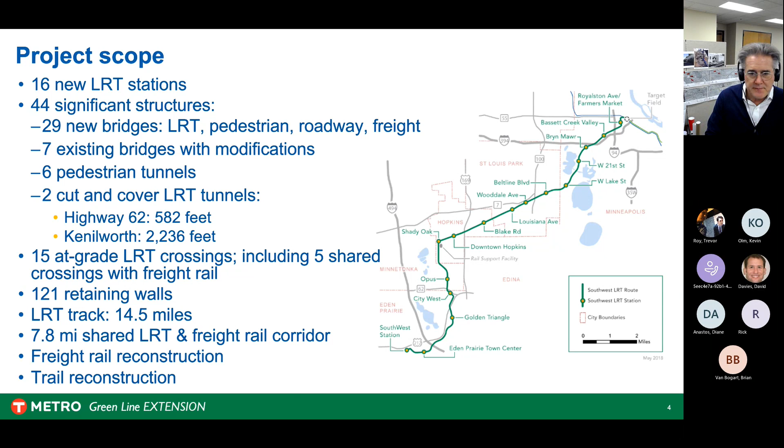That's really the system work, that's much of what you see. For people from Eden Prairie or Minnetonka, quite a bit of that civil work has already been completed - all the bridges, the tunnel, and the track have been laid all the way through a portion of Minnetonka, so we've got quite a bit of work done there. You may also notice, if you're in that area, the catenary poles and some components of our electrical system.

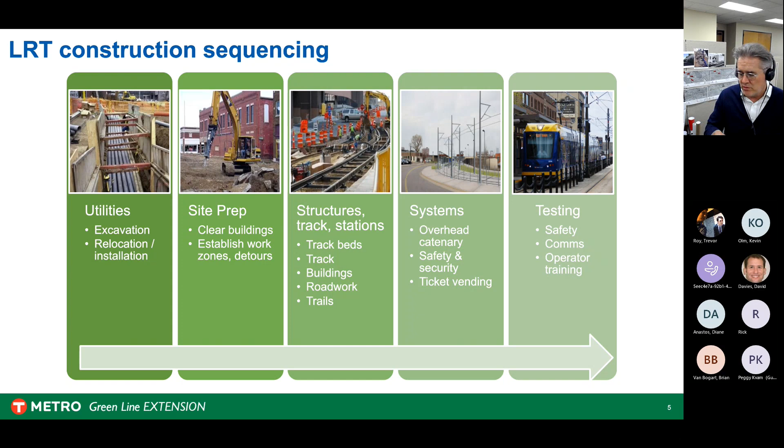And then, of course, after that is done, when we are complete with civil and systems work throughout the corridor, we'll continue on with the testing component, which will take 6 to 9 months.

For those people who have followed our project, we've had a little bit of a delay, some project cost increases, in order to resolve some of the reasons or new components that we've added to that existing contract that had some things to do with those increases.

We had to revise the civil construction contract with a civil contractor, and that's related to the schedule and the procurement for the systems. So we had to revise the systems schedule as well based on earlier revisions with civil. And then we've still got to extend the supporting contract and complete all the total cost negotiations. Then we will have a more revised and accurate project schedule and cost.

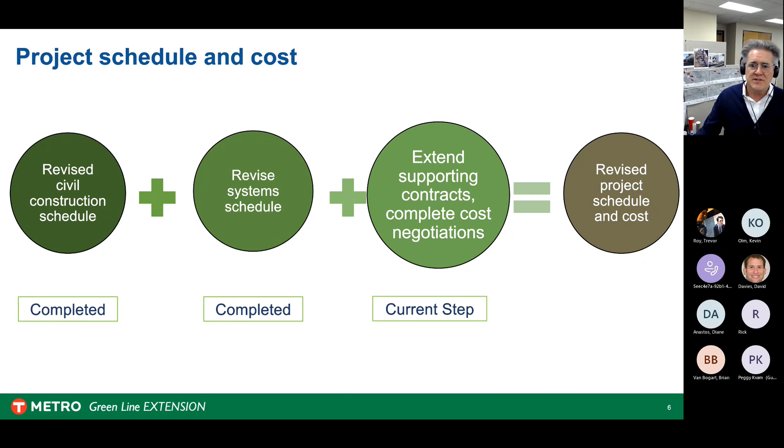I think part of the upside of this slide is that from January 2023, we're exceeding our overall goal of 15% DBE contracts.

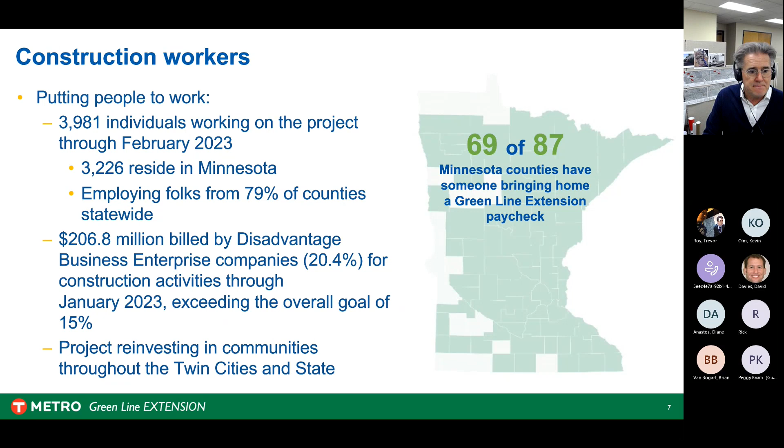So we are very cognizant of the trail community. We have a lot of bike riders even on our project, and it's something we're paying close attention to. We work as much as possible with the contractor to try to improve those timetables and reopen those trails and that entire segment as soon as we're able to do that safely.

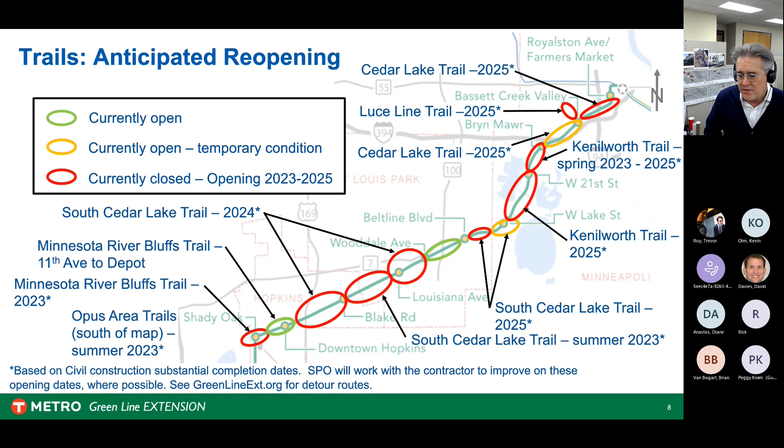All right, on to the 2023 construction highlights. I don't see anything in the chat box. Any questions? So I'll just continue on at the moment.

All right, Eden Prairie. Those of you who live in Eden Prairie, it's very obvious that most of the civil work is done. Most of the big traffic impacts are completed. As you know, we've got a few still remaining for those of you who drive in the area.

We have the final phase 2 construction at Southwest Station starting May 1st to complete the new entry and turnaround areas. Phase 1 construction was the new temporary waiting area, the new bus loop turnaround, and also the addition to the parking ramp. The relocation of Southwest Transit is supposed to happen very soon.

We expect it to happen as early as May 1st, when we will help Southwest Transit relocate to the new loop and also to the new waiting area. They will take ownership of that and begin operating out of there. And then we'll use that as the opportunity to take down the temporary station we put up a couple of years ago for them and resume construction.

There will be some piling for those of you who are down there, some 437 piles we still need to put in to complete that entry and turnaround area. The systems contractor is completing foundations, traction-powered substations, signal houses, poles, arms, and wiring throughout the Eden Prairie segments. The expectation is that most of the systems and civil work is expected to be completed in the Eden Prairie segment by the end of this year.

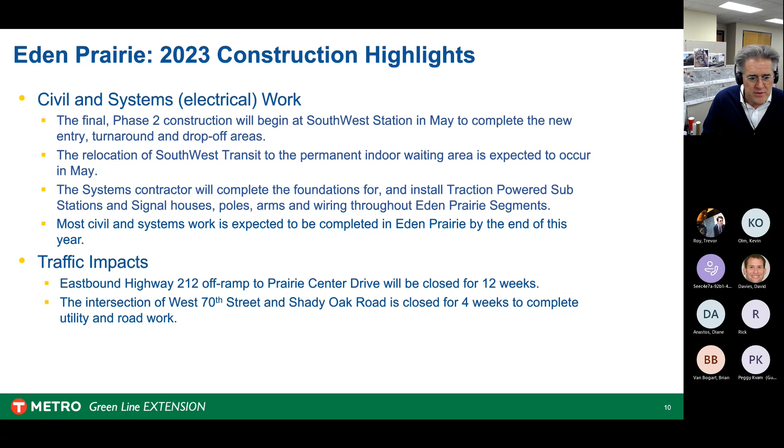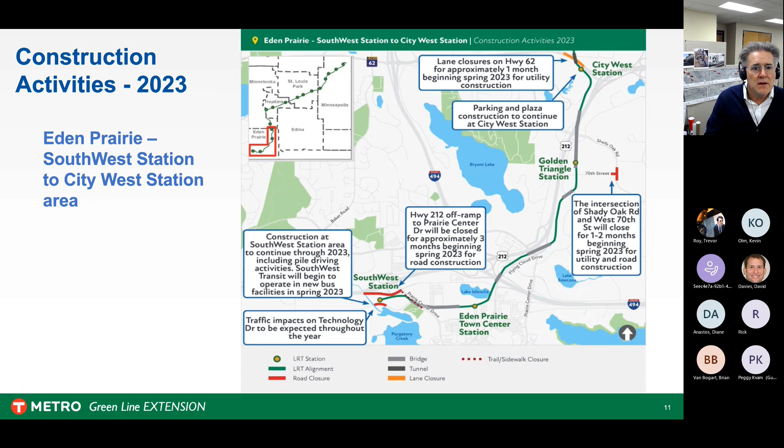We're adding, I think, some 430 additional parking spaces. There'll be around 1,300 total now. And you'll be able to drive through from one end of the parking ramp, the older ramp, to the new section, and then exit and enter and exit right through the parking lot.

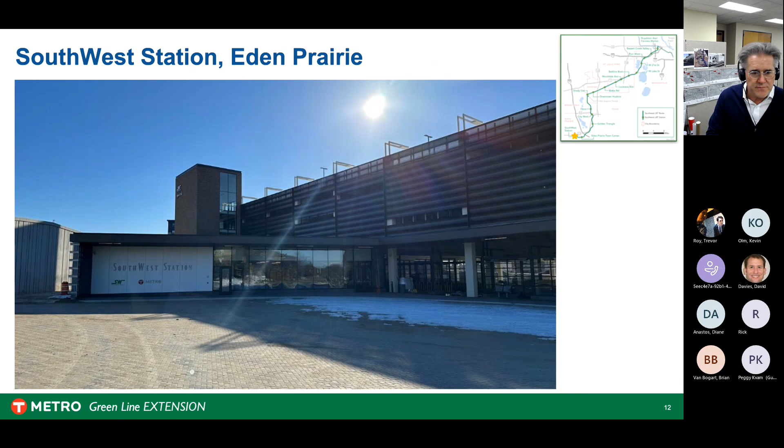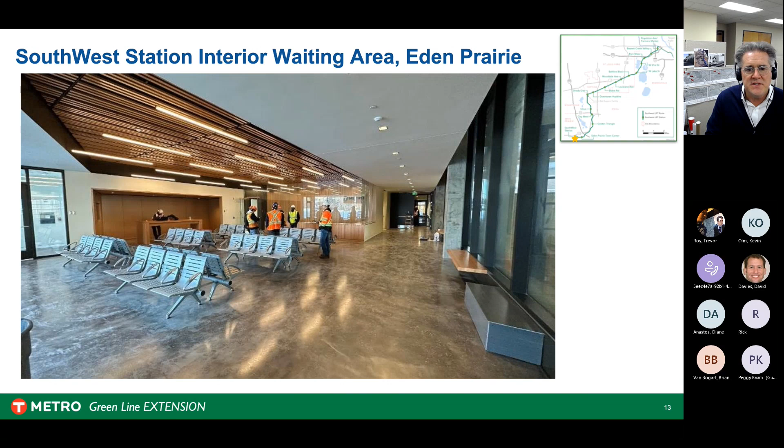The inside of the waiting area, it's a very, I think, somewhat sophisticated interior here. Get the chairs in, and again, this was a couple weeks ago, and they're starting to move in operations now from the temporary waiting area.

Then, of course, taken from the parking garage, you can see the changing landscape in the last 5 years, right? We've had dramatic change down at Southwest Station.

You've got the development of and opening of Elevate, which is running around 97% occupancy, so doing very well. They're on the left-hand side of the picture. You can see there's a new set of shops there that was put up about 4 years ago.

And then in the distance, you can see the iconic water tower. And you can also see the Prairie Center Drive Bridge, the first bridge leaving Southwest Station.

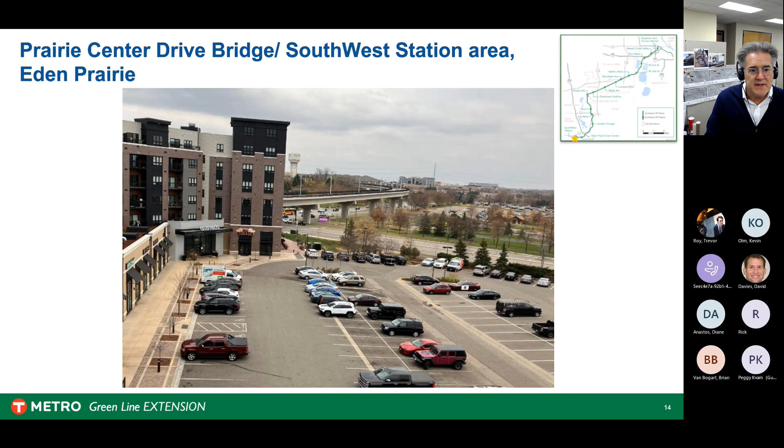And then coming around the turn of that bridge, we see Town Center Station, which is nearly complete as well. We have the new road on the right. You call it the Town Center Extension.

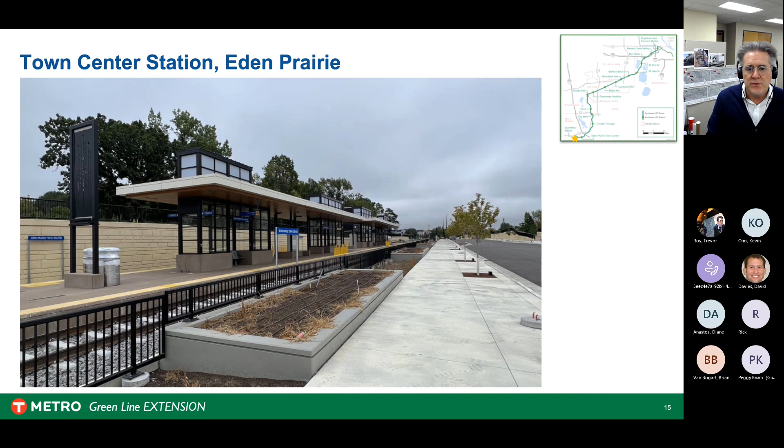We cross West 70th, and then we have our Golden Triangle Station in the distance there. You can see the Optum building just south of Highway 62.

And on the right, for those of you who know the area, you can see Shop HQ. It's that yellow bar and yellow and black building there on the far right. So that station, like all the stations, the progress is going along quite well.

And then you can see, again, the entry from the station to the Shady Oak Highway 212 bridge. Again, a bridge that starts on the east side of Highway 212. We cross Valley View Road, Shady Oak Road, Flying Cloud, Shady Oak. And we cross then to the west side of Highway 212.

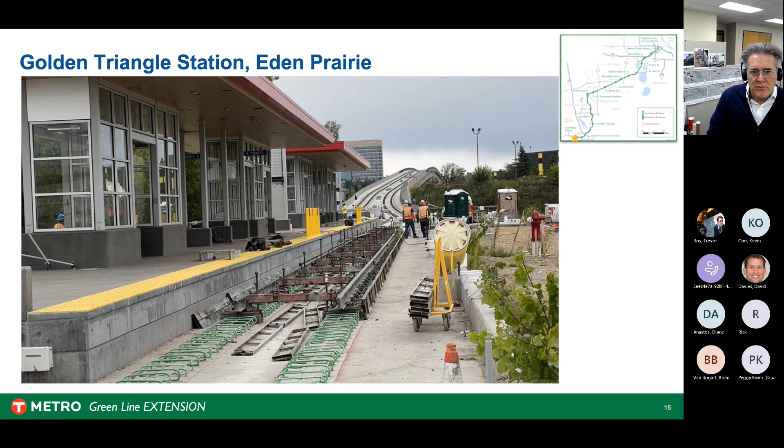We run north, and then when we get to 62, we take a hard turn. You can see right on that corner, just below, just south of 62, a shameless plug for one of our public tours there. You can see a couple of our tour participants there. We had a nice tour.

We were able to walk up alongside of the bridge and onto the bridge, something we will be offering again this year and we'll talk about later on. But that's just a nice view looking south toward Eden Prairie along our Shady Oak Bridge.

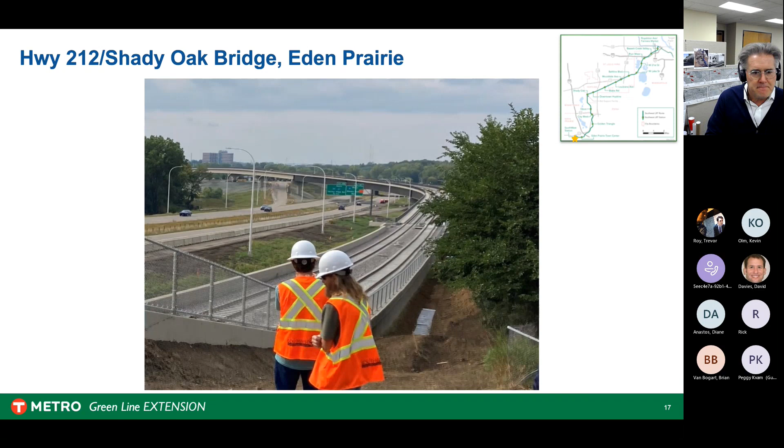And then, of course, if those folks in the picture were to turn around, you'd be looking at 62, and just before 62, we take a hard westerly turn and we enter City West Station area, again, adjacent to the Optum campus. And then from City West Station, you continue on and we go under the tunnel created that goes under Highway 62 into Minnetonka.

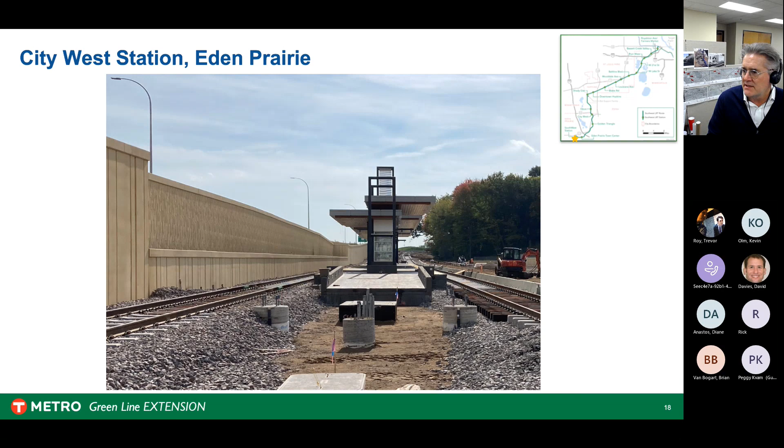So that's sort of the broad overview of 2023 construction in Eden Prairie. We'll continue on to Minnetonka unless anybody has any questions. All right, if not, we'll continue on to Minnetonka.

2023 highlights, again, civil and systems work. We've got road work and landscaping completed in Opus Park this year. And we've got some trails impacted, as people who are in that area know, by our construction, as we do in most cities. And the crews continue to work on the longest bridge in our corridor, the Minnetonka-Hopkins Bridge.

And then again, similar to what's going on in Eden Prairie, we have 16 construction segments in our 14.5-mile alignment, just to break up and organize the construction.

Several of those segments have been turned over by the civil contractor in Eden Prairie, and the same thing is true here in Minnetonka. As they do, the systems contractor picks up the obligations of that corridor and begins systems work—completing foundations, installing traction power substations, the 62 tunnel and signal houses, which if you drive by that area is under construction, and again catenary poles, arms, and wiring up to Smetana Road this year.

Similarly to Eden Prairie, I'd say most civil and systems work is expected to be completed through Smetana Road by the end of this year. That's the hope. And then some traffic impacts.

For those of you who drive through Opus Park, you know Bren Road East is all torn up, a portion of it by the Bren Station apartments, and that's going to be closed for another 10 weeks or so to complete road and trail construction. We also have a single lane closure on Yellow Circle Drive near the LRT tunnel, where the systems contractor is working on foundations for their tunnel house. And then we'll have a bit of a closure for a couple of weeks on Red Circle Drive.

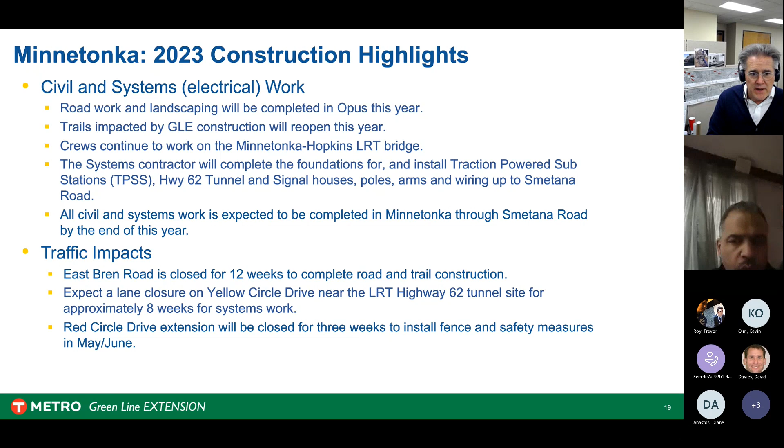We put in a new extension, as people are familiar with Opus Park and the reconfiguration of that park—a brief extension between yellow and red to go around the circle to exit the park, and we're going to be closing that briefly. We needed to complete some fence and safety measures we didn't get to late last year. But again, similarly to Eden Prairie, once all that is wrapped up, we will be out of the way of traffic and out of the way of residents in those areas.

Here's the construction map again. If you choose to look at that, you can have a closer look online later, and you can see the closures in red, with brief descriptions and directional arrows showing you where those closures and that work are taking place.

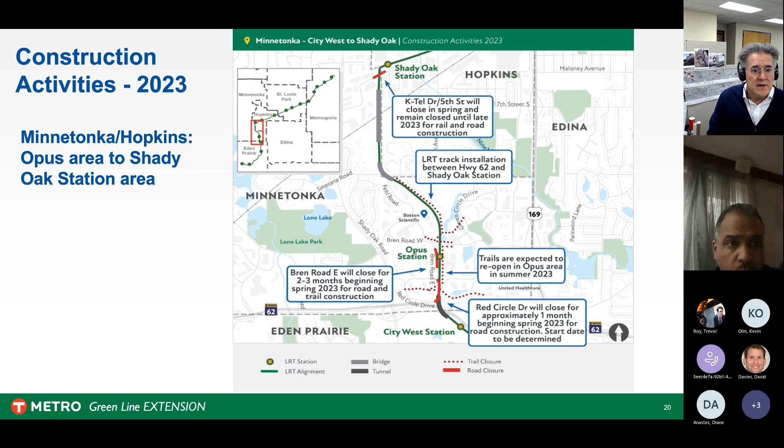Moving on from Minnetonka, we got some photos. Again, another shameless plug for our public tours—they're a great opportunity for people who are interested to get up close and personal with the project construction, in a way you won't be able to once revenue operations start and trains start moving back and forth.

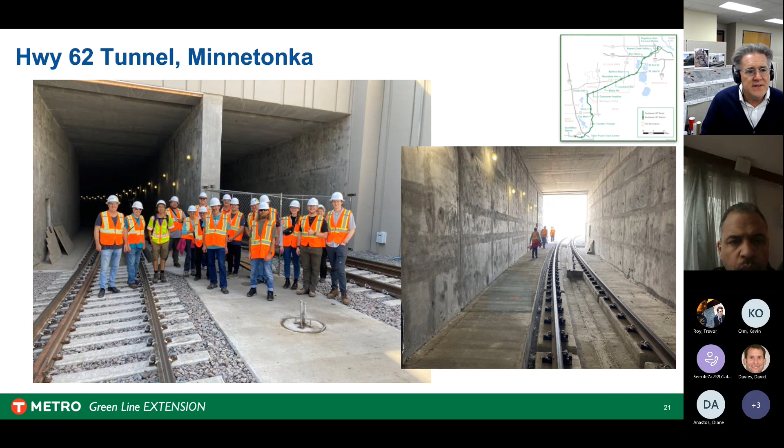This is the Highway 62 Opus entrance or exit, depending which way you look at it. That's our tunnel, and we get to walk through that—we'll do that again this year. When you come out of that tunnel, in the far distance of that photograph, you continue going kind of northeasterly and you enter our Opus Station.

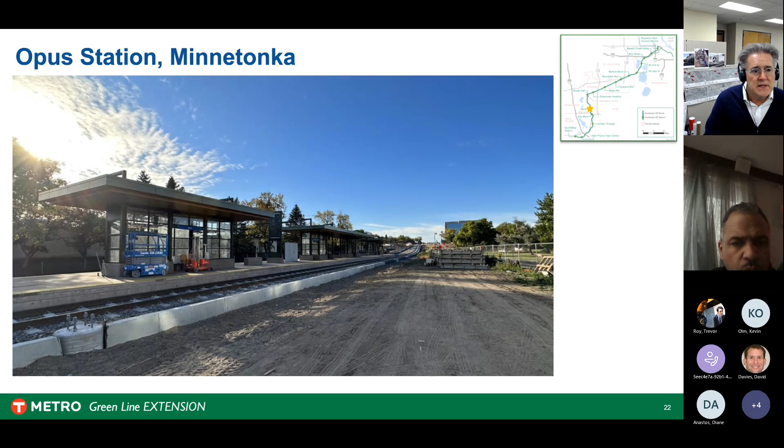If you continue just past Opus Station, in the distance you can see the Bren Station development that opened a couple of years ago. You can see some of the large retaining walls on the other side of that. There's a lot of development in Opus—about 5 different developments, including this Bren Road Station and the adjacent apartment complex. You can also see to the left, adding upwards of around 2,000 new units to that area within a half-mile walking distance to our station.

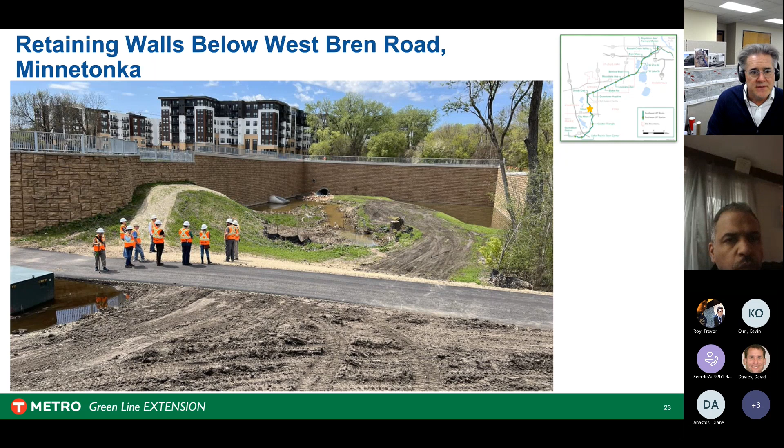Continuing our way up the alignment, we go north. Once we get beyond that wall I just showed you a photo of, we go north towards Smetana Road, where you can see we had a lot of construction going on over the last 3 years. On the upper left, you can see the Smetana Bridge, and just to the right of that is the Feltl Bridge—those are 2 new land bridges.

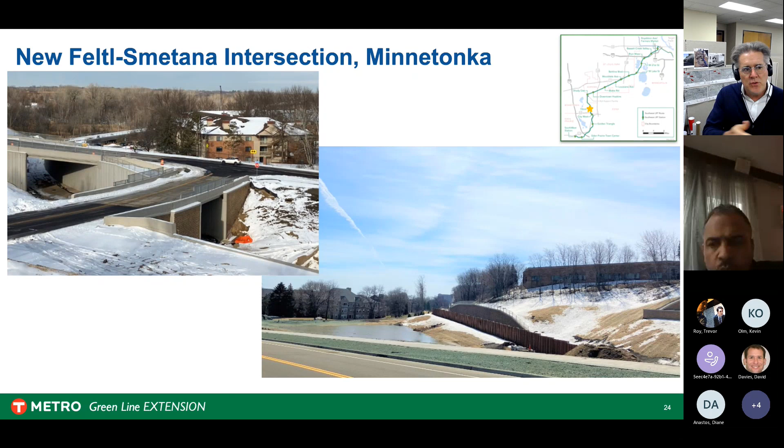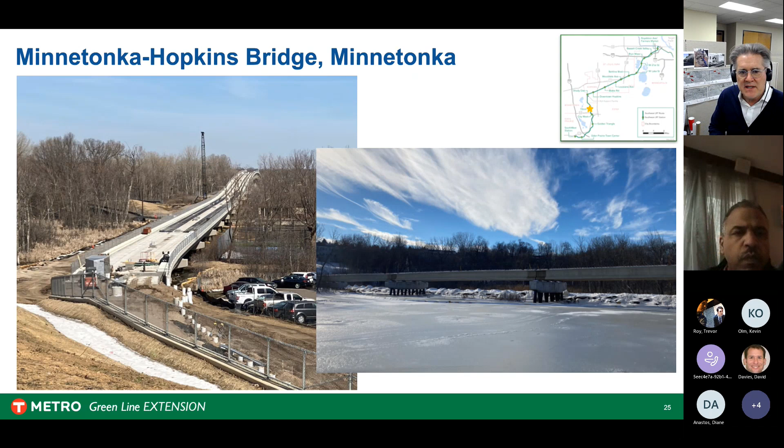In the photo on the right, looking south from Smetana Road, you can see the noise protection wall in the foreground, and the retaining walls coming out from Opus Park, continuing to the right of that photograph, or to the left near Feltl Bridge in the upper right. We continue then out to the Minnetonka-Hopkins Bridge, seen in these photos, which is the longest bridge in the corridor. In the far distance of the photo on the left, you can see it really rises—the reason it's rising that high is to get over the railroad that runs underneath it—and then it lands on the other side into Hopkins.

All right, we will stop there and pause. That's the end of the focus on Eden Prairie and Minnetonka. If anybody has any specific questions about that, please feel free to ask us now. Otherwise, we'll continue with a briefer overview of the rest of the corridor.

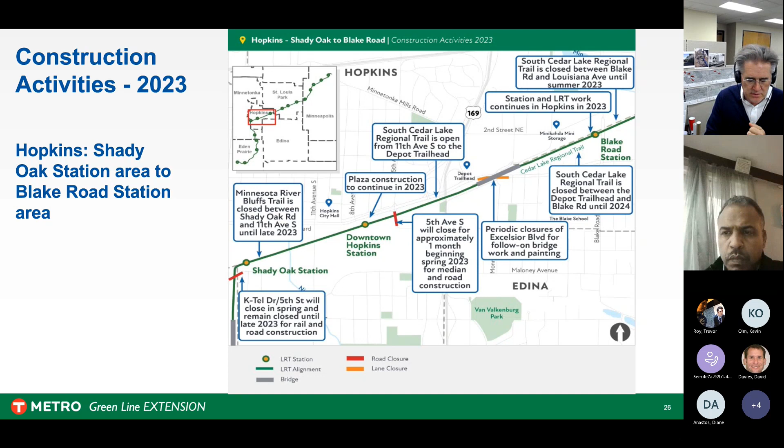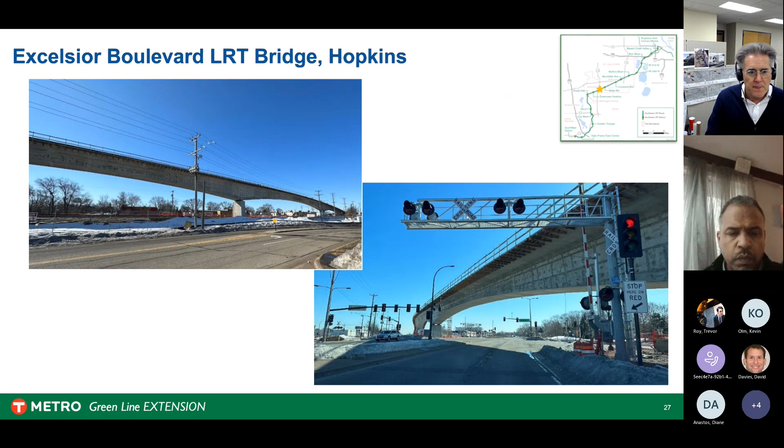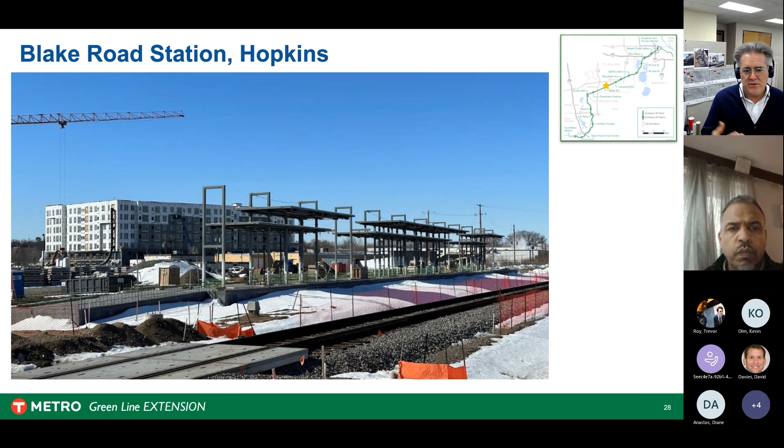As you continue eastward, we're looking south here from roughly Pizza Luce, looking from Blake Road, kind of southwest. You can see the Blake Road station, and in the distance, some significant development going on - about an 850 unit development in that whole complex when it's done. Just behind, looking in this direction from Blake Road, there's another 800 plus units going up in Hopkins, close to the station.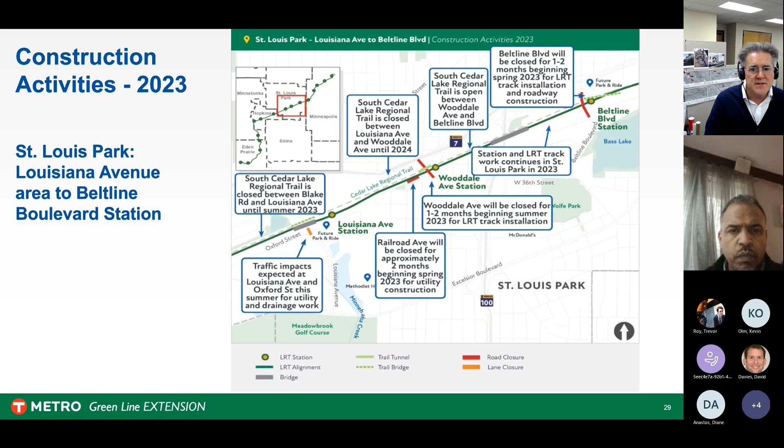Now we move to St. Louis Park. Again, I won't be redundant - you can consult that map for more information if you're interested online.

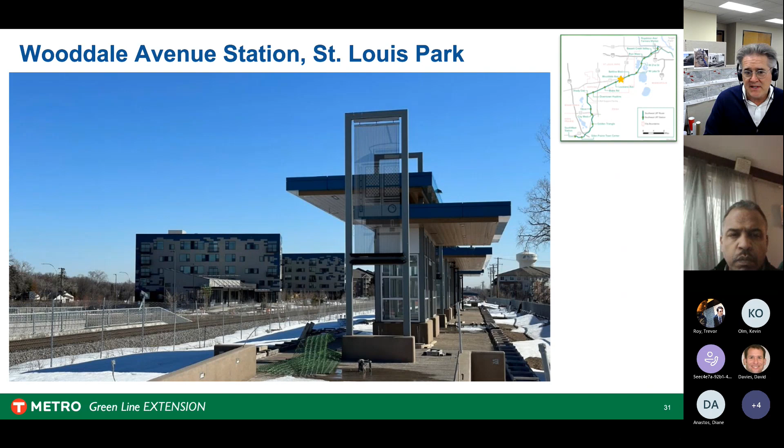Continuing on to Wooddale Avenue, you can see in the distance Via Sol, another new development that will start leasing in the future. That's the Wooddale station, and just to your right would be 36th Street.

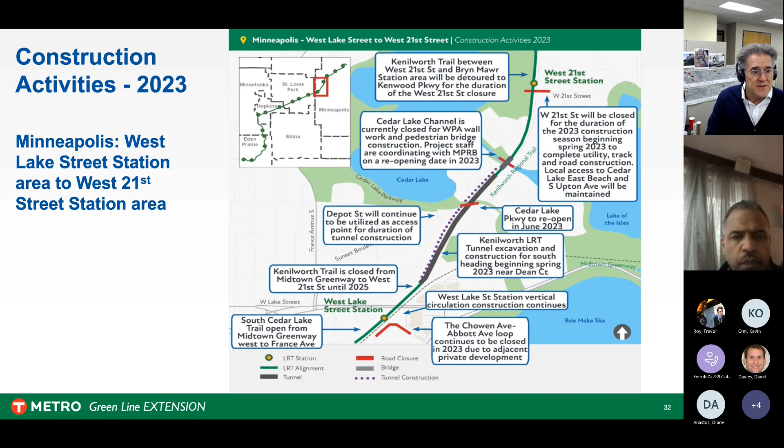Just a summary then of one of two slides upcoming - there's a lot more work as now we're heading east. You can see a lot of the work is completed already on the civil side, but we've got quite a bit still to do as we move eastward. You can see there's quite a few more bubbles here in the first half of Minneapolis, from Lake Street to 21st Street Station.

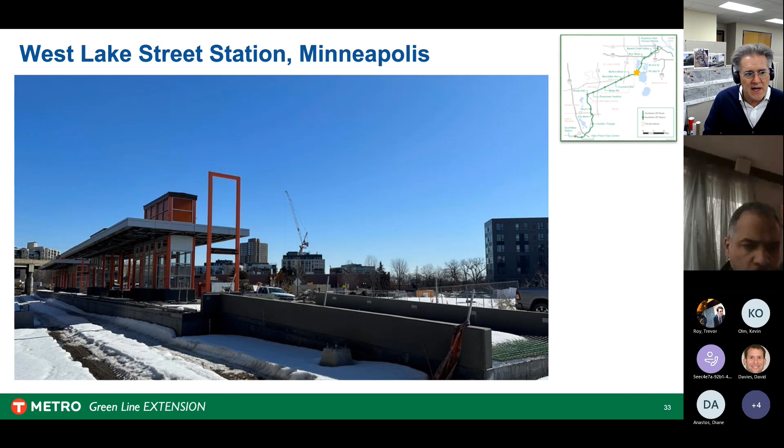Then we come to our Kenilworth Tunnel, where you can see a general overview of the Secant wall construction, which is coming to an end, or may have already ended. If anybody has any questions about that, we've got our subject matter expert.

Looks like Hytham has joined us. We also have David Davies, who has extensive knowledge of that area, having been the Minneapolis coordinator for many years.

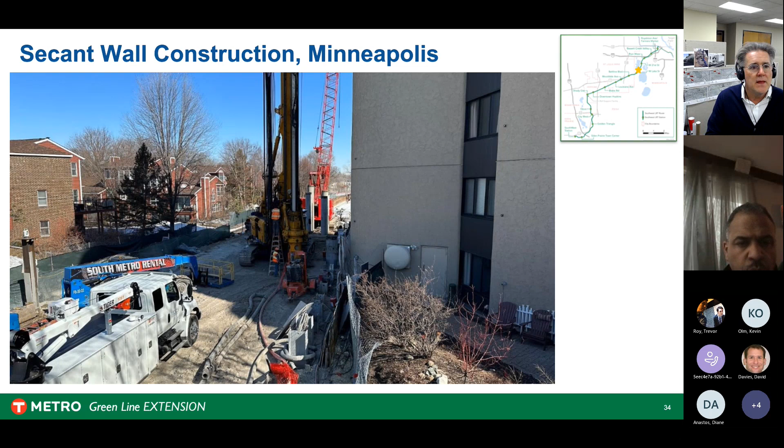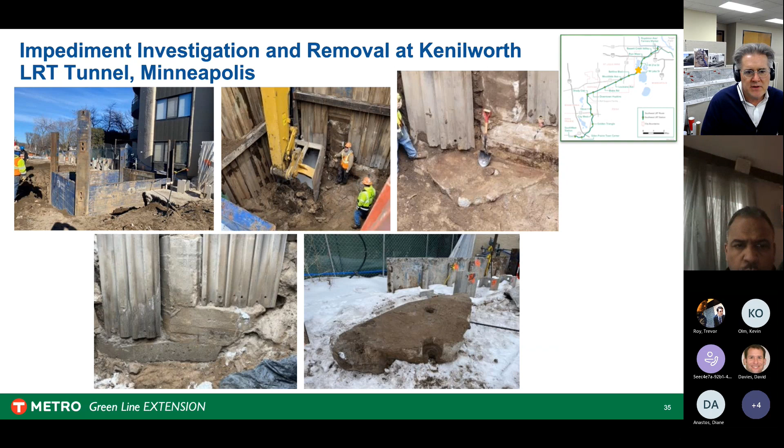Some of you might have heard about the impediment investigation while we were putting in the secant wall. We do thousands of borings during the design phase to ascertain the soil and collect information for the environmental process. In this particular instance, we didn't quite detect this impediment, and it turned out to be really nothing - just a corner of a piece of foundation from a nearby structure. The photo on the bottom right shows the corner that we cut off. It didn't have any impact, and we were able to complete that secant wall and continue on with tunnel construction.

Here's a nice view of the tunnel from down in the tunnel - that's again the Kenilworth LRT tunnel, a very complex tunnel. If anybody would like more detailed information on what makes up that tunnel, the size of the slab, and its depth, I'm sure David could provide that for you.

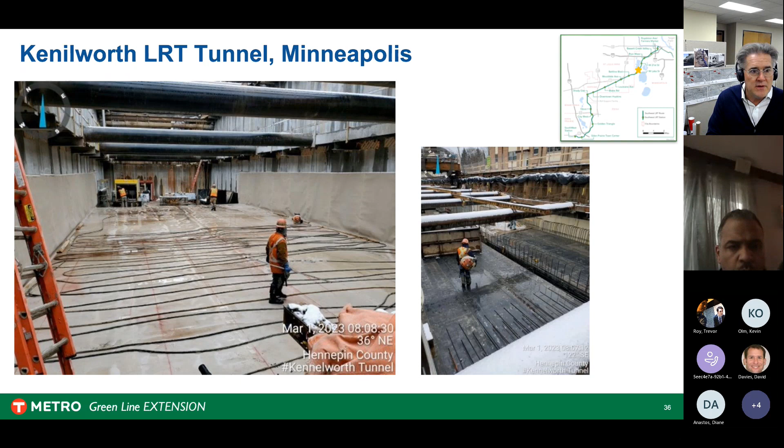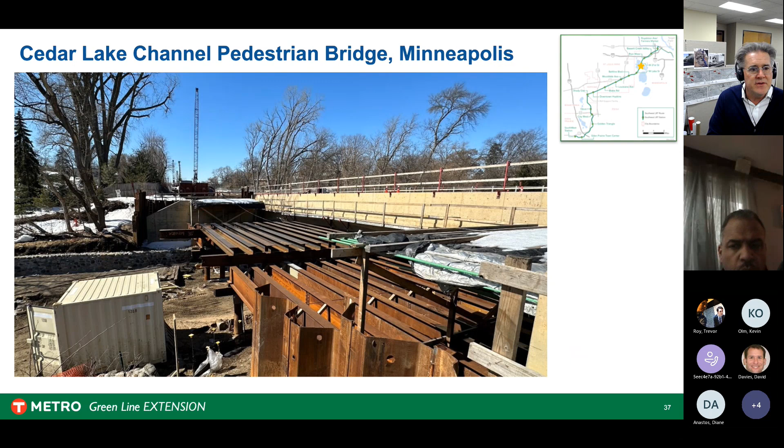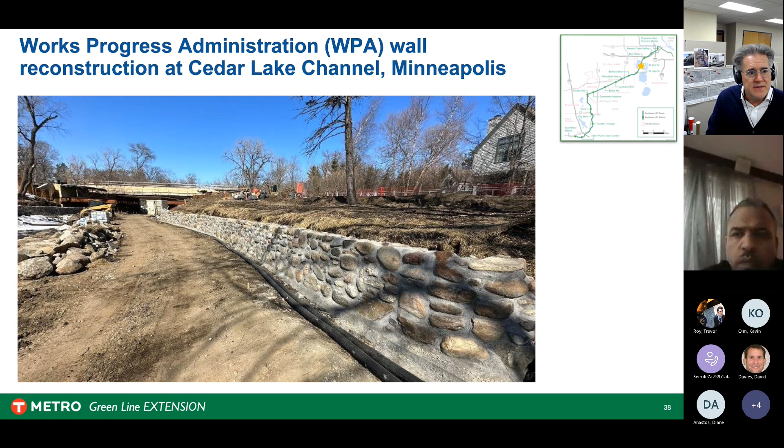And then the Cedar Lake Channel pedestrian bridge - I think it's our third bridge there. There was a rail bridge, the light rail bridge, and now the pedestrian bridge. Part of our environmental process is that we have to fulfill the FTA's requirements, looking at 16 different definitions of the environment, one of which is historic properties. This is a historic wall that had to be rebuilt according to their scale. It's nearly complete, or looks like it is, and that was completed recently.

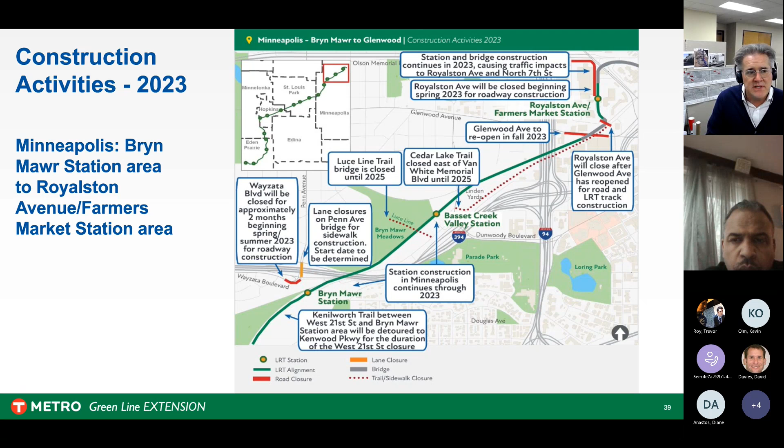Continuing on to the second half of our construction activities in 2023, the Minneapolis Bryn Mawr Station to Royalston. At Bryn Mawr Station, in the distance you could see what will eventually be that pedestrian bridge, taking people from the parking lot right below 394 over that bridge down to the station. There'll be lots of good trail connections there as well.

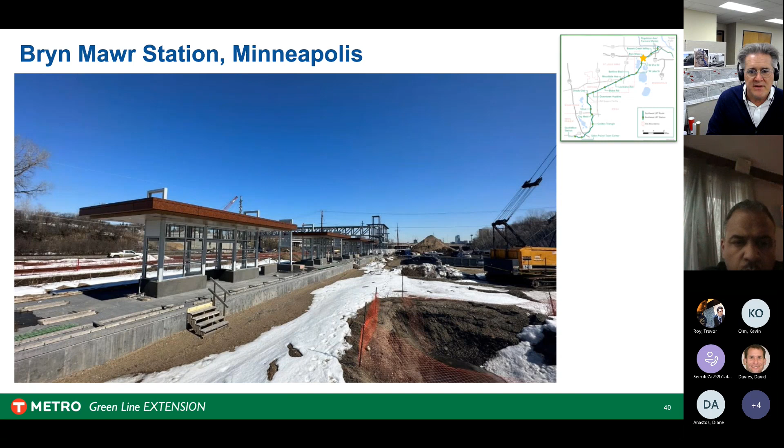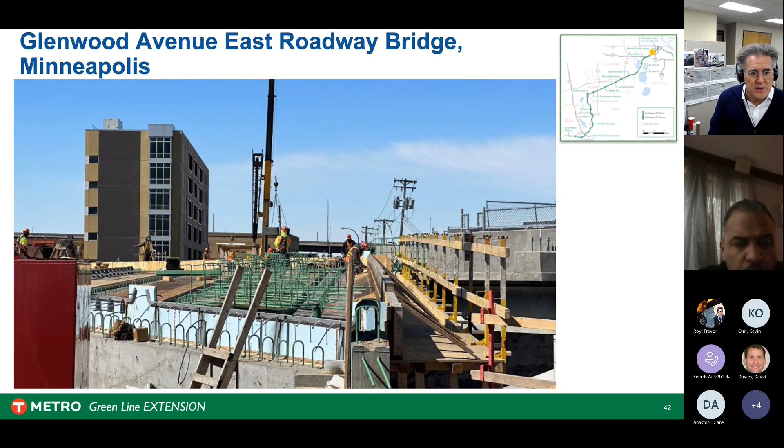Bassett Creek Valley Station, and that complex Glenwood Avenue roadway bridge, where we have the new portion of the Glenwood Avenue Bridge being built, as well as continuing on grade crossing over the new LRT bridge. That's quite a complex enterprise. If anybody's ever been out there to see that on a tour, or just out of interest, you can see that construction is very interesting.

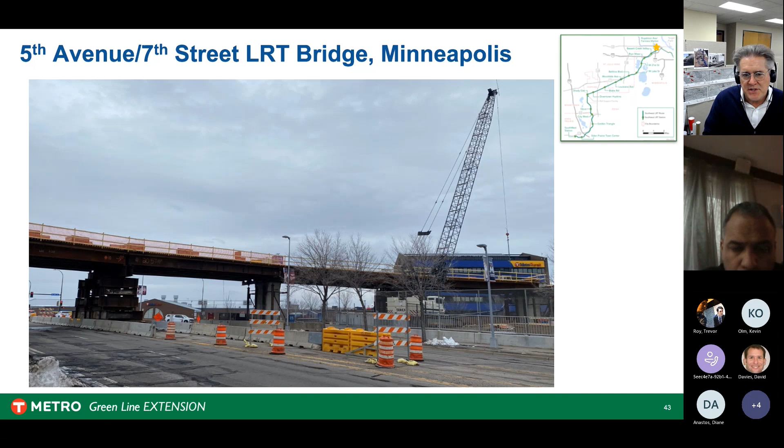And then of course the last photo, you can see the final turn of that 14.5 miles since starting at Southwest Station. We have that 5th Avenue, 7th Street LRT bridge, where you can see the connection to Target Field Station. You can see Heywood, our Metro Transit facility, in the distance there.

All right, that's the end of our presentation for our 2023 update on the civil side of things. We'll move on to the systems construction.

Just a couple quick slides here. It's kind of interesting - we have on-track machinery that's custom made to stay on the track. I think the highlight here is that unlike civil construction, there's very little public disturbance. We don't impact the roads as much, unless there's a grade crossing, but generally most of systems work takes place on the corridor, on the track.

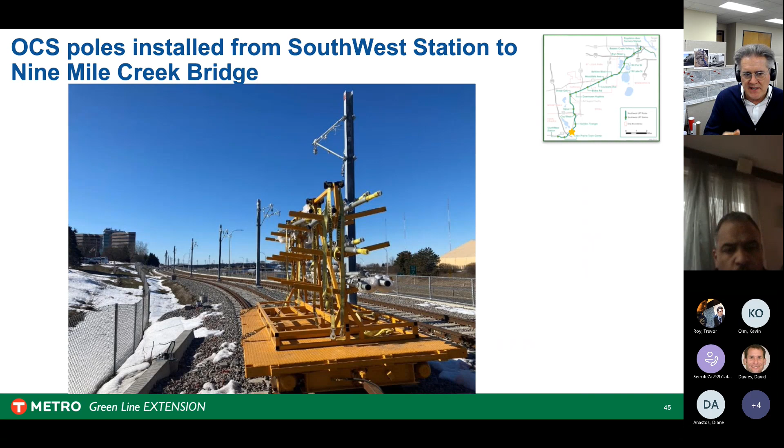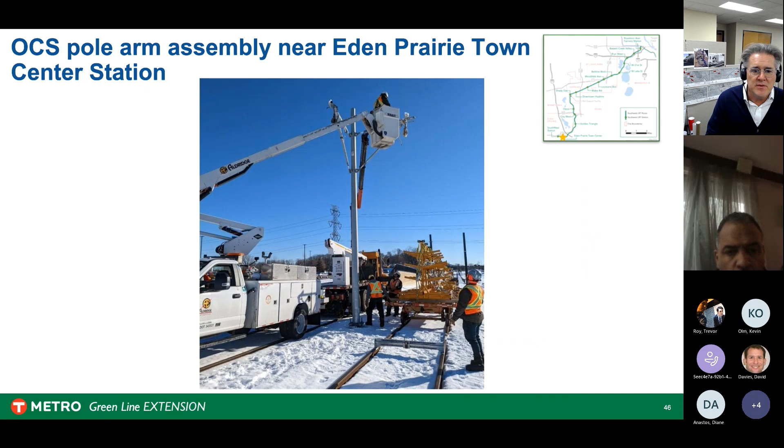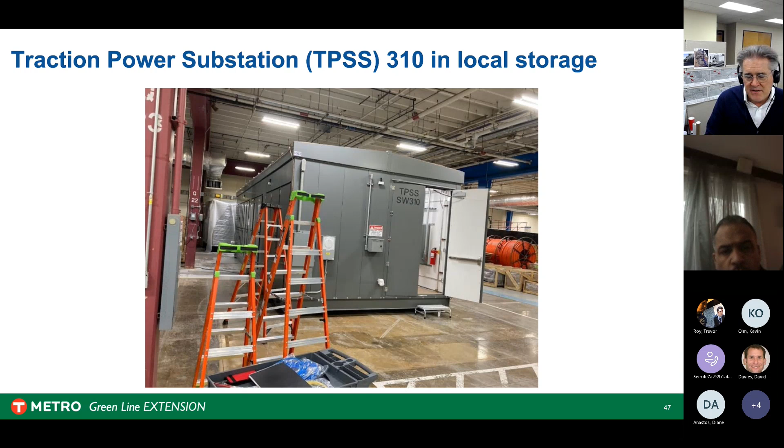You can see one of the installations of our OCS pole arm assembly - we've got some arms that go on after the poles have been put in. And then we have a big warehouse up in Golden Valley where our traction power substations are delivered. We also have signal houses, crossing arms, and all sorts of things that are then delivered down to the sites.

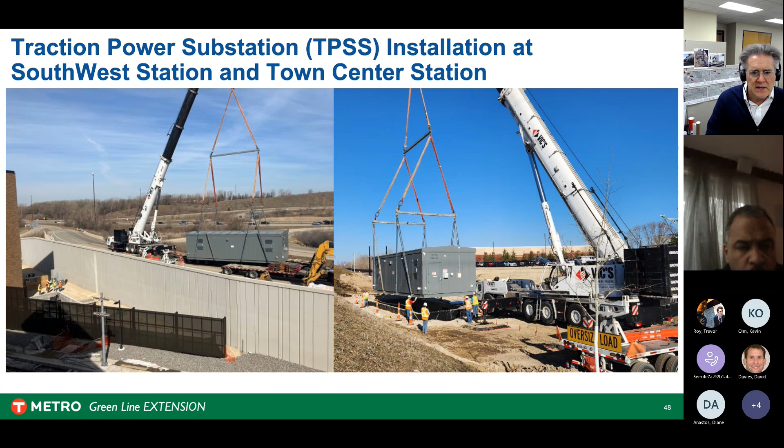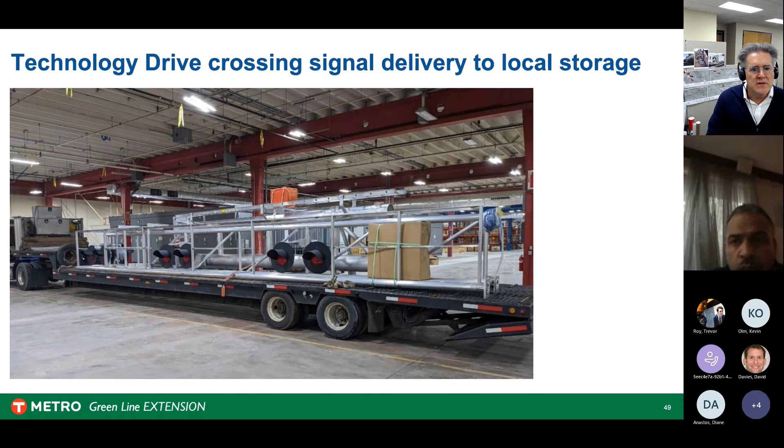The second photo here to the right is our Town Center Station traction power substation. There's about 19 of these along the corridor, and they're about three-quarters of a mile apart, providing the AC to DC connection to power the system. Again, our technology-drive crossing signal that was delivered to the local storage, our warehouse up in Golden Valley.

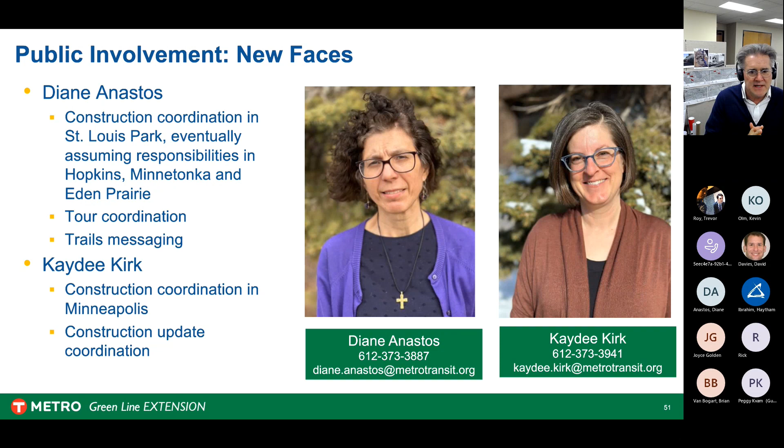All right, finally, communications and outreach update. Again, photos so you can more familiarize yourself with our 2 new coordinators - it's Diane on the left and Kaydee on the right. You can see their responsibilities as they continue to get up to speed and become more familiar with the project. It's like drinking from a fire hose, I think - we have a lot of information to digest, but they're doing a superb job, and we're really super happy to have them on board.

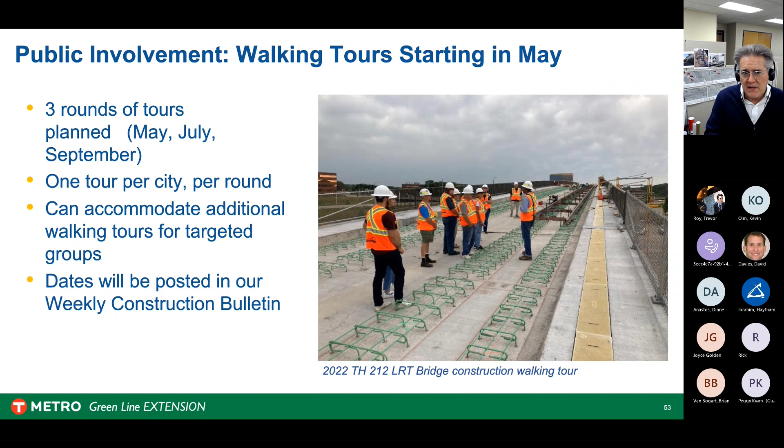We'll continue our tours. We enjoy those tours. It's a great opportunity for people who are interested to get out on the corridor and see some of the construction up close. As we have in the last 2 years, we'll do 3 rounds: May, July, and September, one tour per city per round, and we can generally accommodate between 15 and 20 people. If you have a group and would like to arrange a tour, we're not limited to these public tours—we're happy to arrange one for part of the alignment you're interested in.

We get quite a few public emails, and a lot of work goes into working with the civil and system side of things. A lot of people are impacted and have questions. In 2022, we had about 165 calls and emails. The general trend is fewer every year as systems, particularly on the west, wind up. This is our hotline—if you don't have that number, you can find it online, and you can call for any reason, not just to report something. If you have a general question, we try to get back to you within 24 to 48 hours.

We put this weekly construction update out during spring, summer, and fall construction season. It rolls off to about once every two weeks in winter due to lack of work, but we're now up to the once-a-week update again. In 2022, the subscriber rate has risen significantly since we started this update in 2019—we're about 18,237 last year, probably more this year. It continues to rise and is a very good resource for people who need to keep up to date on where construction is happening, particularly if they travel near our corridor and have traffic concerns.

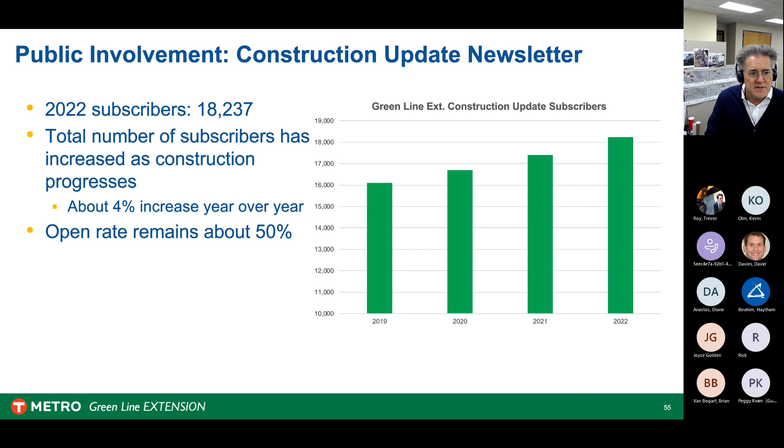That is the end of the formal presentation. We'll leave a few minutes here, as much time as you need. We've taken about 32 minutes, so we've got another 15 to 20 minutes at least—if people have any questions, this is the time to ask.

Hi, James, it's Nancy Litwin with Eden Prairie Center Shopping Mall. Can you hear me? Yeah, I can, thanks Nancy. I just wondered if you could update us on the excess expense and what the current status is on how that might be paid.

David, would you like to take that question, or Trevor? I don't know if you can hear me. Sorry, can you say that one again? Thanks, Nancy, can you repeat that? And just for future questions, I really appreciate, Nancy, that you introduced yourself and let people know where you're from. If anybody else has questions, just let us know your name before you ask. Thanks, David. So Nancy, can you repeat the question?

My question is regarding the project being over budget and the excess expense—wondering if you can provide a status update to the group on the latest proposal in terms of how that excess will be paid. Sure, I'd say it's a work in progress. We were able to come up with some of that funding last year with our county partners, and we continue to work through that process with them. I don't have any firm updates to say we've closed that funding gap right now, but you will certainly hear about that later this year as we progress with the project.